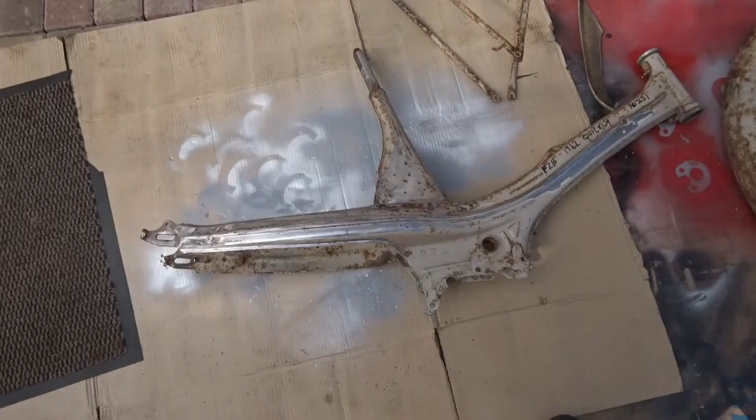This video is the restoration of a 1962 NSU Quickly. I was going to leave it with the original patina on it, but I've decided against it. I just think it's a bit too rusty. I might do that with some other one later, but this one I'm going to clean it off and restore it.

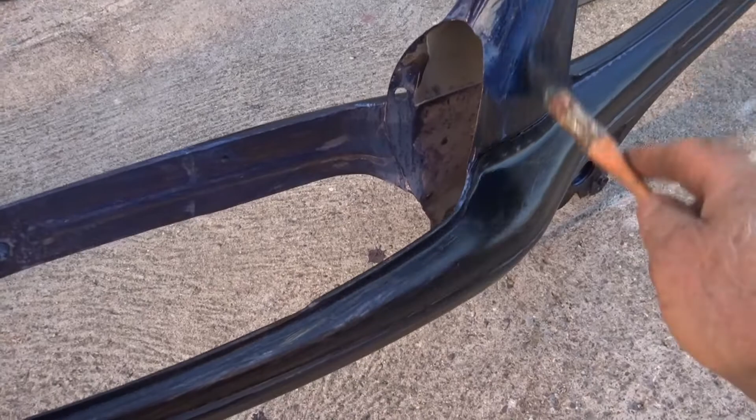Now that's the main frame. I've just finished cleaning it off, so I must put some Kurust on it now to stop it from rusting, and that'll do for today. Now I've just applied the Hammerite Kurust, which is what I use, and it turns a kind of a blue colour first, and then it changes to black as it dries. Just trying to make sure that I have every bit of it covered. I'll turn it upside down now and get the underneath of it once that section is dry.

Now it's after turning completely black. Still not fully dry, so I'll leave painting it until tomorrow. It's getting late in the evening now for painting. Temperature is dropping.

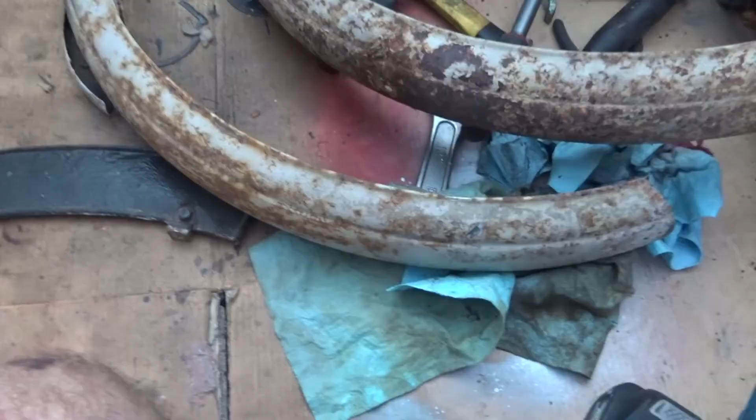These are the mudguards off of the bike and the carrier, so there was an awful lot of rust on them, so too much patina altogether, so I've decided to clean everything off and completely restore it. Now I had it undercoated, and I've just put on the finish coat there, light grey. And over there I have one of the mudguards half done. I must do the inside of it, so I'll crack on with them now.

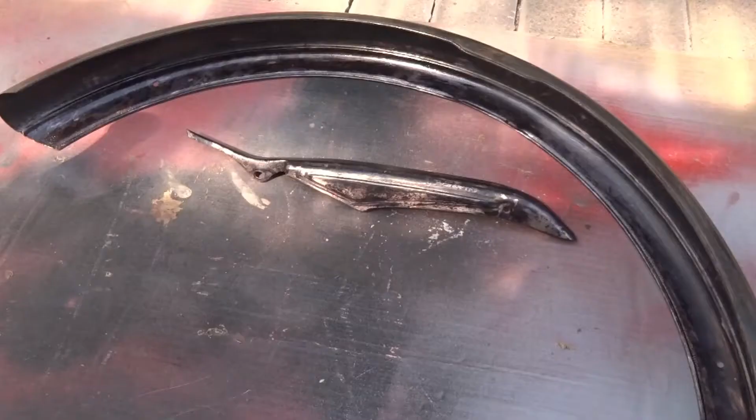The main frame now has been drying for 2 days, and I'm just after putting the plate marker back on, which is on the stock there where the swing arm goes on. The frame number is also stamped in the frame just above it. I have the front mudguard with the Kurust on it now. I'm going to undercoat it next, and the rear chain guard, I have that done as well, so I'm going to undercoat them now before they get painted later on today.

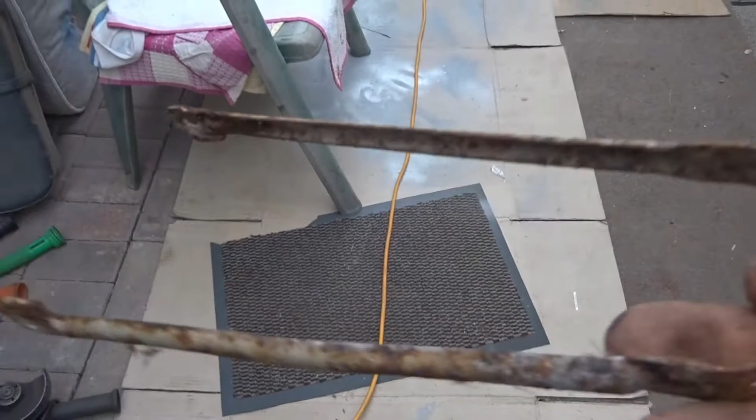I'm working on the mudguard stays at the moment. I've just put the Kurust on that one. I have another one there to do, so that's what it's like before I start. And I have 2 more of them done there. The Kurust is drying.

This is the saddle that I'm using now for the 1962 NSU Quickly. Needs quite a bit of restoration. I must take it apart. It's all damaged and unusable.

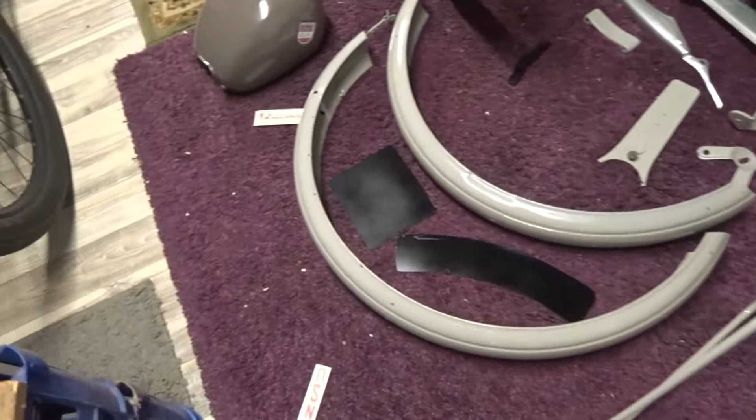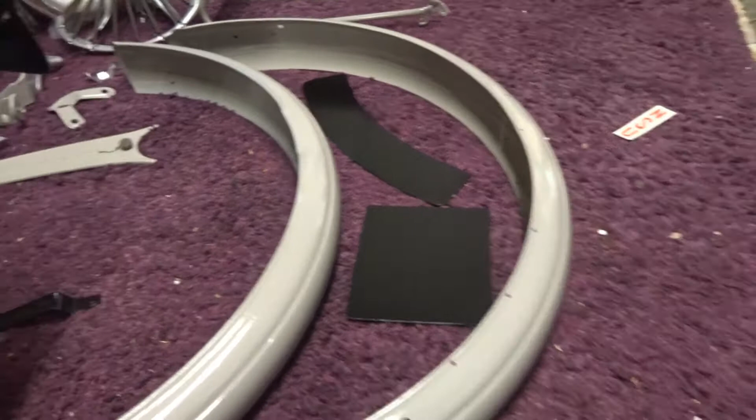I've got quite a lot of the parts for the 1962 Quickly painted now. They've been sitting for about a week or more. I haven't everything done, but I have quite a lot of it done, so these are the parts here. Number plates, number plate holder, different things, and I'm just putting the stickers on the petrol tank at the present time. So the badge is on and the Quickly writing, so I must just put on Quickly on the other side here now, and I must put NSU on the back mudguard. I must do the numbers on the number plates as well.

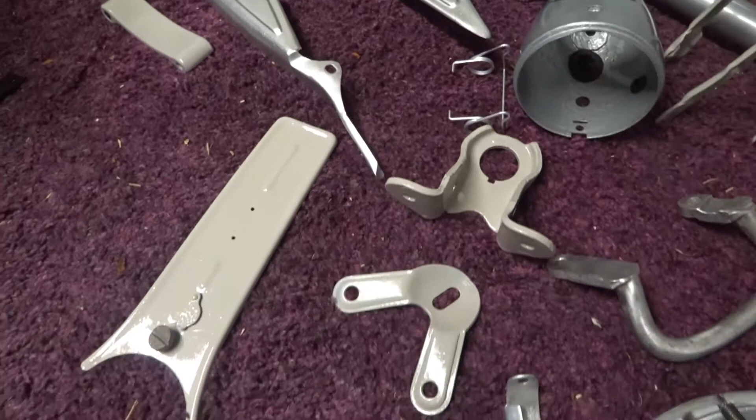And that's the seat that I completely restored, and just a soft cushioning to go there, and more than likely this crimson cover is going to go on it, but we'll see when I have most of it put together whether I'll put the crimson, cream or grey one on. I've done the light, I have the spring there for it. The mudguard sections there to hold the mudguards in place. The mudguards themselves. Swing arm. It's completely done. And the main section itself. And the nameplate is on it as well.

Now I'm just attaching the Quickly to the tank, and I'm rubbing it as much as I can to get it to adhere to the tank. There was a white backing on the thing, you have to take it off and make sure that these letters stay stuck to this see-through section. So hopefully when I pull that off now, the see-through section, the letters will actually stay. I have to pull it off slowly just in case anything is not 100% stuck.

That's it. Turned out perfect. Just give it a slight rub to make sure it's okay. So that's that. I'll do this one on the back mudguard a bit later. That's the mudguard there, but I have to check where exactly the number plate is going to be sitting on the mudguard so that this goes actually above the light then.

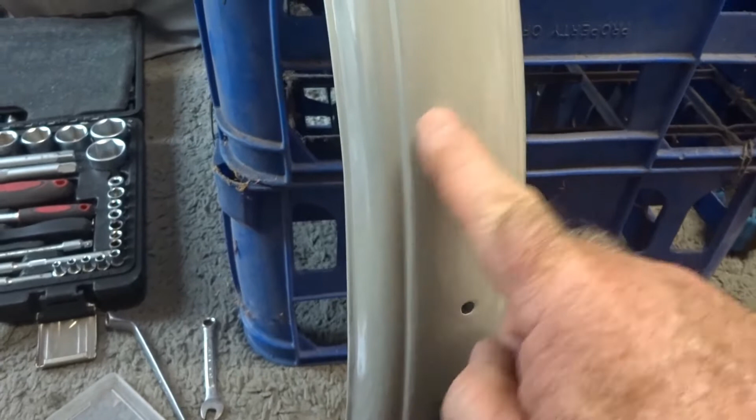I've attached the NSU symbol on the rear mudguard there now, and the measurement for it is roughly 275 millimeters to the bottom of it, because the rear light is going to be situated here, so it has to be above that 27.5 centimeters or 275 millimeters.

I'm now attaching the number plate bracket with 4x10 stainless steel nuts, washers and spring washers. So I'll carry on with that now.

Yes, I'm continuing here now, and I got sick of cleaning rust off of items, so I said to myself I needed to start seeing a bit of progress on putting the bike back together. So what I've done there now is I've actually put in one of the suspensions there at the bottom, and I have the piece here for putting in the other one. There should be a spring there somewhere as well.

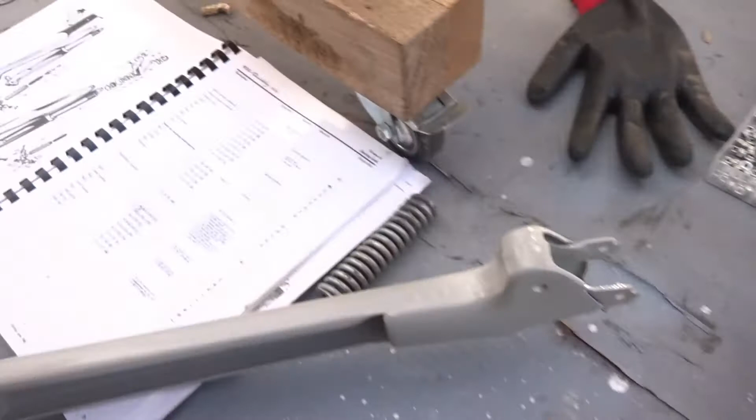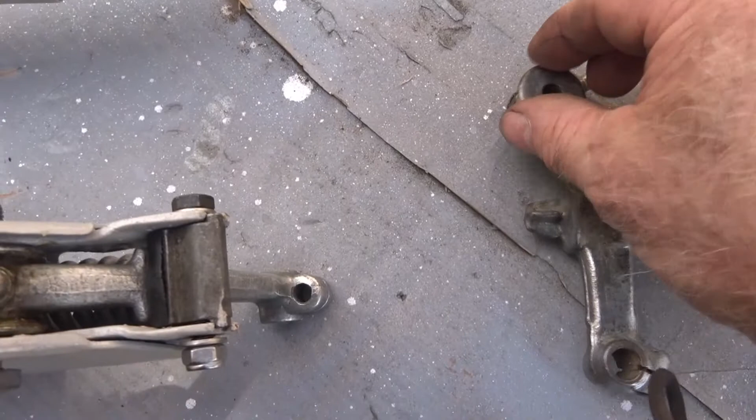That is there. So what you do is put the spring in first, like so, and there's a little space up there at the top that it sits into. Then you take this unit, and it has to go in at the back here where the big holes are, like so, and this section sits into the hole in the spring. So you've got to put it in there without that falling off. Like so.

So now we've got to get a bolt through it, which is this one. And this bolt goes from the outside in, like so. I'll have to do it now. That goes through that and out the other side, and in some cases the mudguards attach on here, so I'm not going to put any nut on there at the moment.

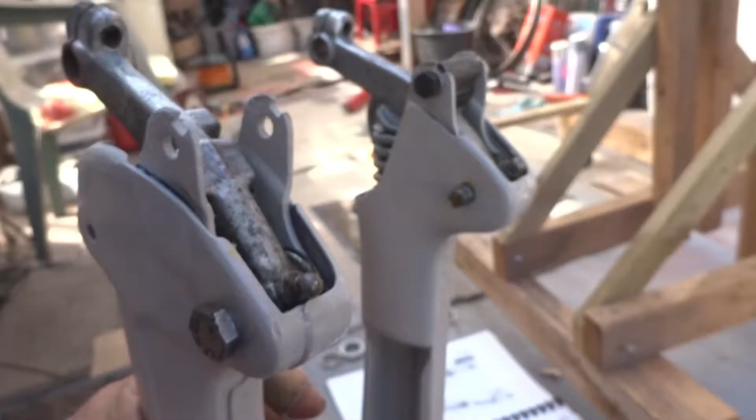Now I have that bolt in there, and I must now put the little rubber suspension on here with its bolt that goes through. The way to install this here is there's a little rubber cushion on the lower section of it, and a bolt goes through the top section to hold it in place, but to get it on you've got to push down on the spring on the front. But it's difficult; if I had somebody with me, I could show it better.

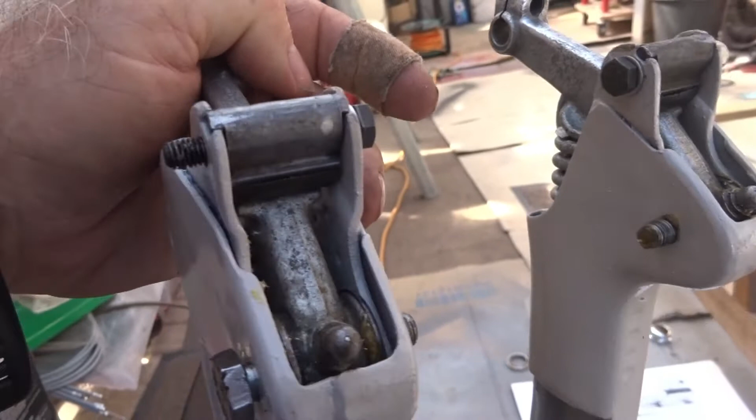Now that's it gone through there with the bolt going through it. It doesn't matter which way you turn the bolt around, inside or outside, it doesn't matter.

Now I'm actually going to put on the swing arm and I'm going to attach it to the frame itself. And these are all the component parts here, which are in the book somewhere there. The top nut, the finishing nut, the locking washer, that's the unit that holds the handlebars, which is there. Then there's a circular washer underneath, which is there. Then there's a nut which goes on. Then there's a cover plate that goes over the top ball bearings, and that's the top ball bearing race.

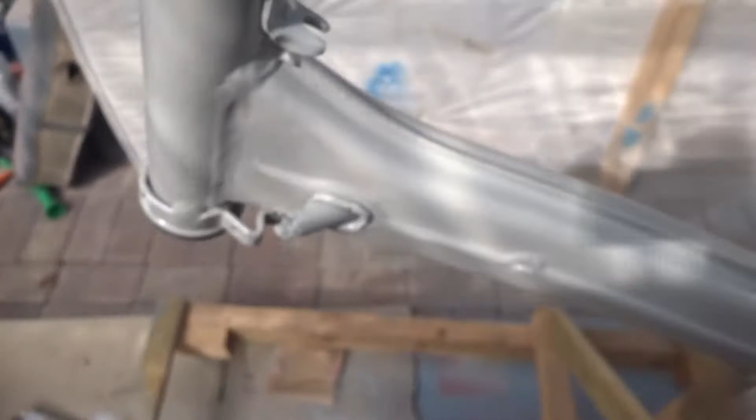So I've got to put on grease here now and 21 ball bearings, and the ball bearings are held in place by that cup there. Now I've attached the 21 5mm ball bearings to the bottom section, which will go up through that, and I've attached the 21 5mm ball bearings up on top as well. Now I have to work quickly. I'll be putting on this top race, the cover plate and the lock nut so that all the ball bearings won't fall out. So that's the next time you'll see it.

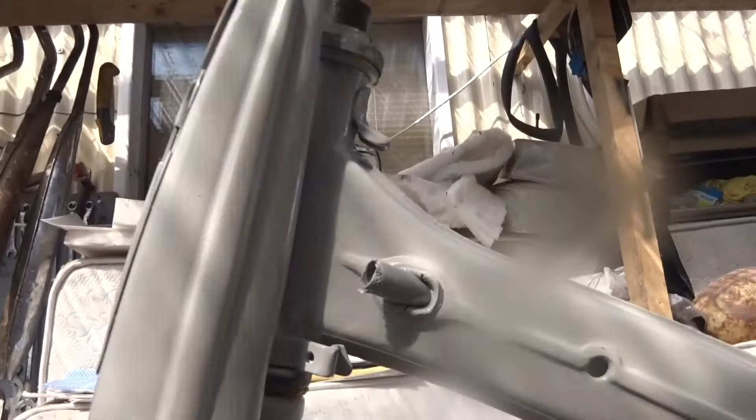Now that's the swing arm in place, and it's held down with a 36mm nut. I have a box spanner that I use to tighten it, so I'll just tighten it up like that, and that's it, as far as there anyway. It's working perfectly.

Now the next thing to put on is this circular washer that goes on there, like so. And then the mechanism for holding the handlebars and the light goes on next, like so. Then the lock washer goes on there. There's a little section on it there that goes down into that hole. And finally the lock nut.

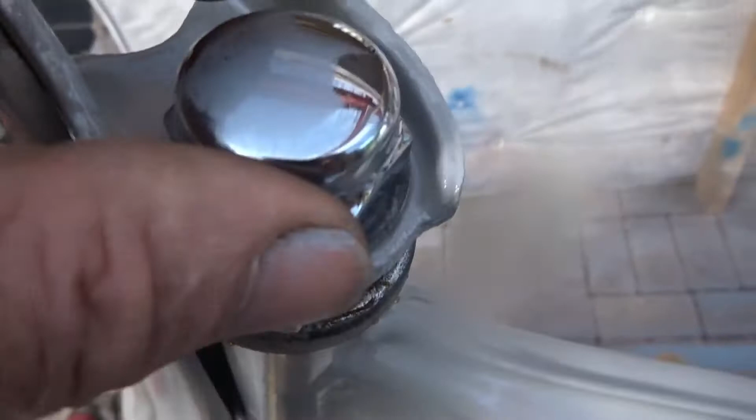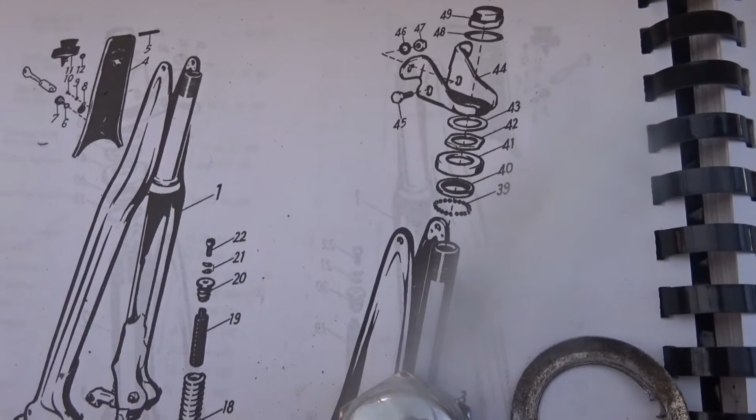But I've got to attach two 8mm bolts there now onto that to hold it in place, and also to stop any movement here so that the ball bearings couldn't actually fall out. So I'll take them off for a second and I'll put them on in a minute. Now the two bolts that I required there, number 45, are 8x18, and I must put washers on them, spring washers inside and nuts.

So I don't have 8x18s, I have 8x25s. I'm using stainless steel, so I've put on two of those, and I must put on the spring washers now inside, like so, and then put a nut on it and tighten it up.

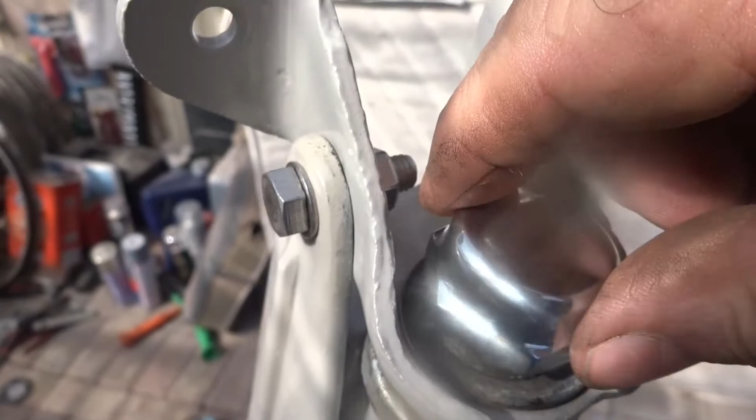Easier with two hands. Now those two 8x18 bolts are what you're supposed to use. Right, this is the lock washer going on, and then this is the final finishing nut at the top. I think it's 32mm in diameter. My box spanner is specifically used for this, for Quicklys. It's a 32 and a 36, so this is the 32 at this side.

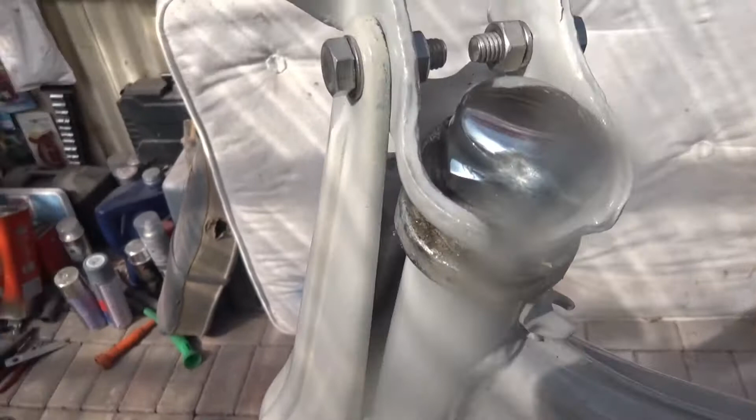So I need to put a bar in there now and just tighten it down. So that's it for the moment. I'll tighten that now a bit better. To install number 9, which is a little rubber plug. This is it. There's one on each side. Number 9 is a rubber plug, and they're them. So they go into that hole there.

One there, and there's another hole there. So I'll put them in there now. They're difficult to put in. Now that's one of the little rubber grommets in place. The other one is at the other side. And the purpose of them is that when the swing arm goes back like so, it has something to bang off of. As you can see, they do tend to wear out quickly enough, but when they're not there, if you're banging the swing arm off of that, you do tend to bend it slightly.

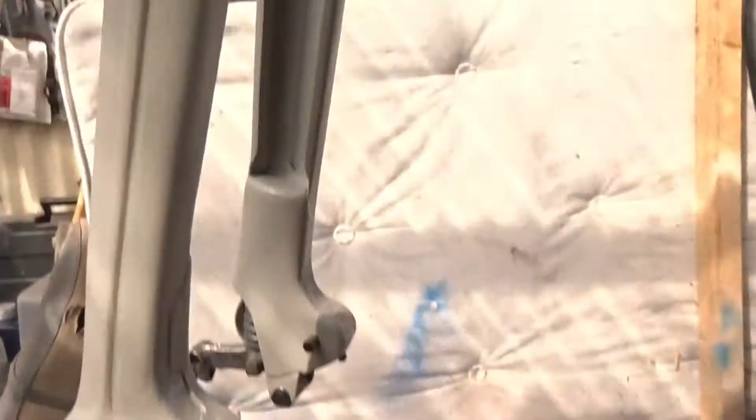Next thing I'm going to attach is the front mudguard, and it has a hole there, and in actual fact I was looking at the book, and number 16 is a bolt. It can be M6 by 12 or M6 by 15, so that's what I've got, an M6 by 15, and it goes up through that threaded section there where the toolbox cover goes on. So I'll put that on next now. Now that's the bolt in place, the M6 by 15, and I put a washer on it, and I put a shake-proof washer on it as well.

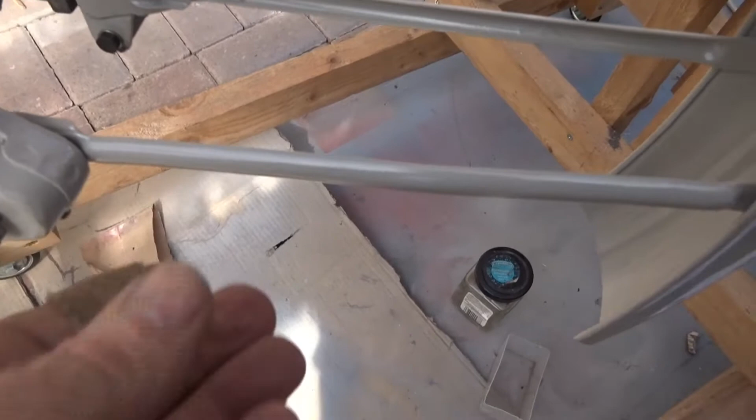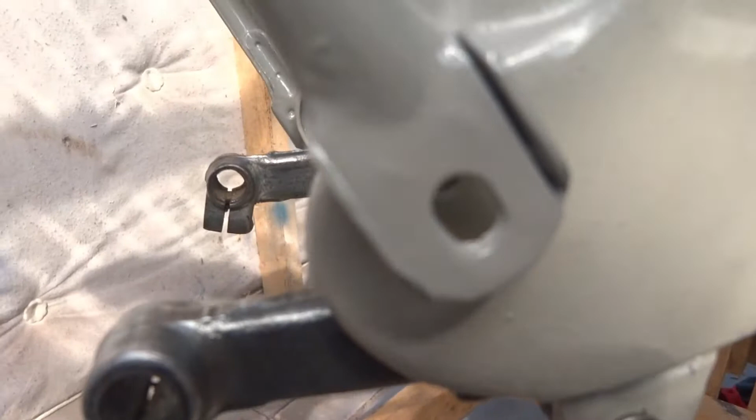So the next thing to do now is to put on the mudguard stays. One goes on there, one goes on there. Now that rear section of the front mudguard is a short one, the stay is quite short. I'm going to attach it now with 4mm stainless steel nuts, bolts and spring washers. The front one then is a bit longer. This is the one here, and that attaches there to that, like so. It's just a bit of manoeuvring to get the holes lined up, and that will be that done then.

Now I have the two mudguards in place. I must put on the two nuts there yet, but I must clean them off. They're a bit on the rusty side, and paint them. There's an unusual thread on those things, and the nuts that I have here don't actually fit on, so I'm going to have to reuse the ones that came. Now the front mudguard is the same as the other one, 4 by approximately 8 to 10mm. I had only 20mm, so I'm going to cut them off with the angle grinder.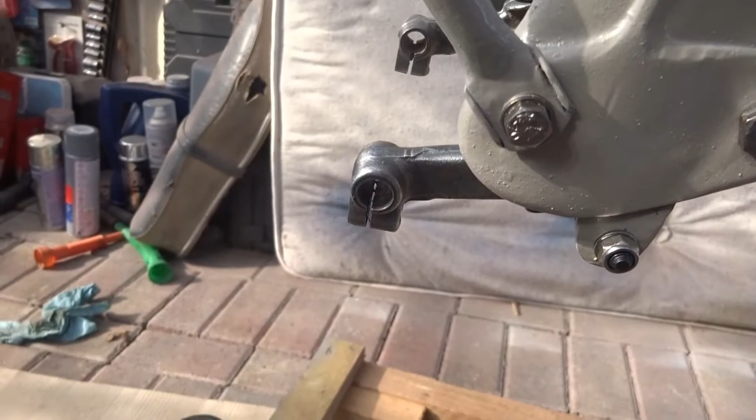And down here then it says in the book to put in number 18 and 19, I think it was, yeah, 6 by 8. I've actually used 6 by 10 with a washer and a spring washer to make sure that they don't come back out. So that's the front mudguard now in place. I think I'll put on the rear mudguard now.

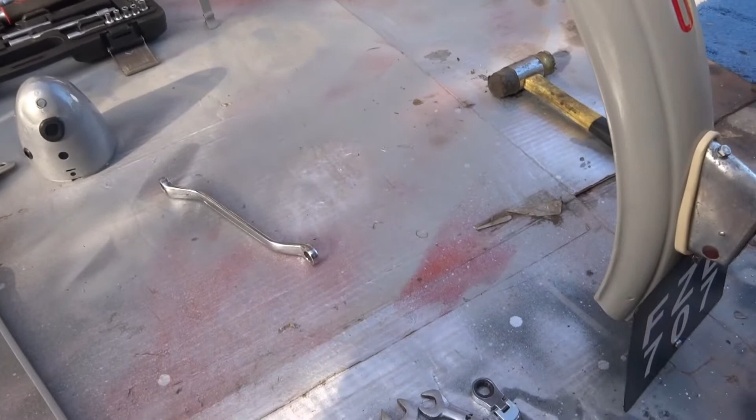The rear mudguard, and I put on the taillight yesterday, so I'll actually be putting on the wiring loom when I have that on as well. It's one of the best times to put on the wiring loom, when you have the mudguards on before the wheels. I put on the taillight yesterday, and the NSU sticker and the number plate, so it's now ready to go on to the frame, and then I'll be able to put the wiring harness on and bring the wire out to the rear taillight.

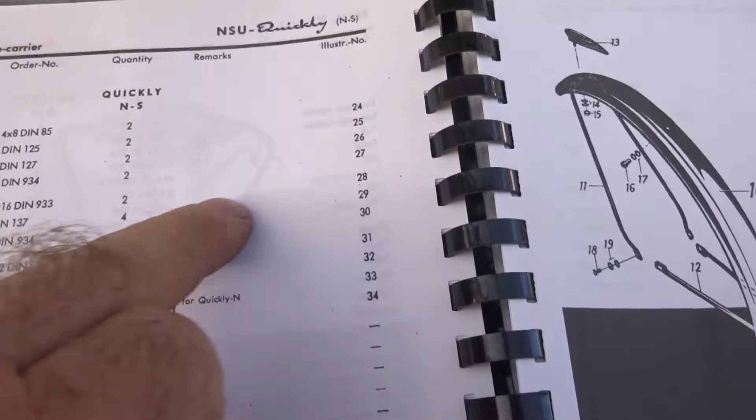Putting on the rear mudguard, you have to install it with number 28. Number 28 is M6 by 16 bolts, and then inside spring washers and M6 nuts at the other side, which is inside here.

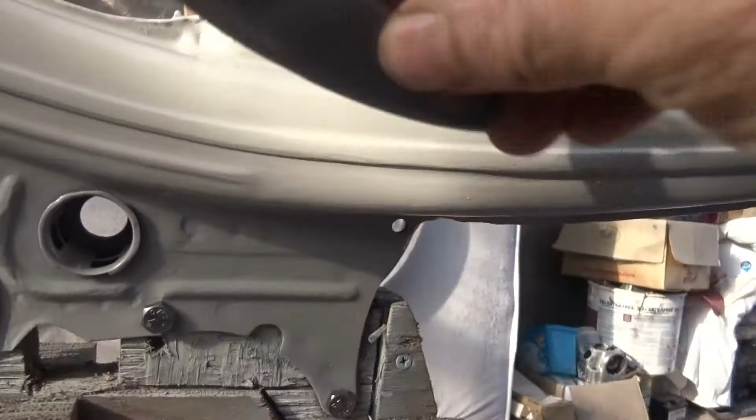So this section here doesn't look great, so they invented this piece to cover it that goes on there, and it's bolted through the mudguard. Now that's the cover plastic in place there as well. 6x16 bolts. I used lock nuts internally altogether, even easier. Next thing now is the rear mudguards and then the carrier.

I have the rear mudguards there. Again, I've used M4 nuts and bolts. Mine are 20mm long. I'm just going to cut them off. They're meant to be, I think about 10mm is long enough for them, maybe 12, so that they don't get caught in the wheel. And if you'll notice the mudguard that I've put on this one, there's a hole here. This hole is for the chain cover.

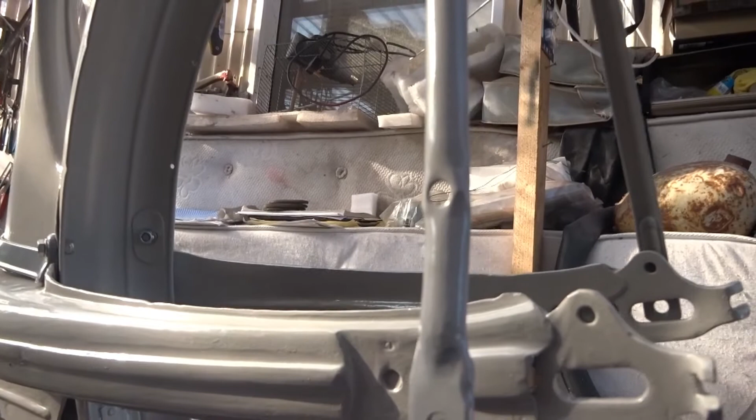This is the chain cover. The chain cover goes on there like that. It's attached to it, a 6mm by 10mm bolt there, and a bolt goes through there and in through that hole there. But I need to put on the other stays, mudguard stays first, before I can do that.

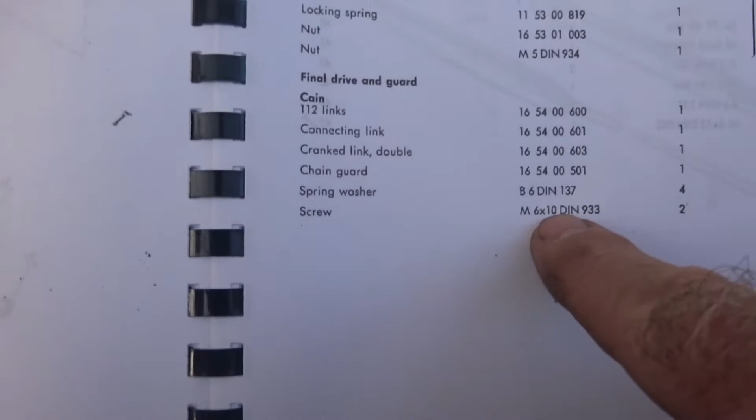This is the chain guard at the rear, and I'm just looking for the size of the bolts. Number 30, they're 6x10, and number 29, spring washers, so there's 4 spring washers to be put in as well. Yeah, so that's it. I've just put the M6x10 to hold the chain guard there in place. This is the best time to do that, put the chain guard on, because it can be very difficult afterwards.

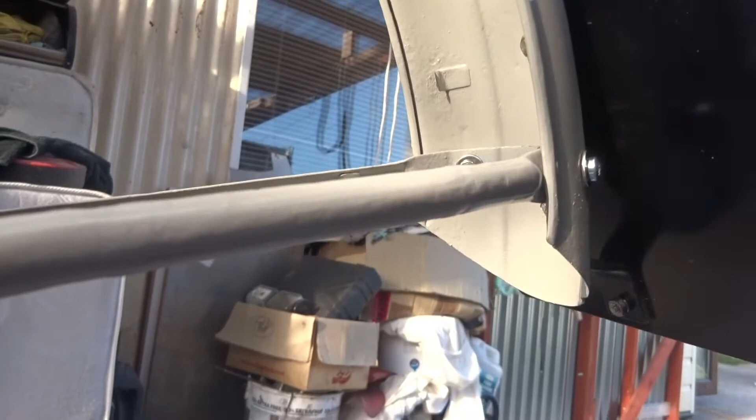Now that's the rear mudguard in place again with the 4mm bolts, and it goes on like so. And if you see here at this side, there are tabs. They must match up with these tabs here because they're for the wires. The wire must come across at that side and out into the taillight.

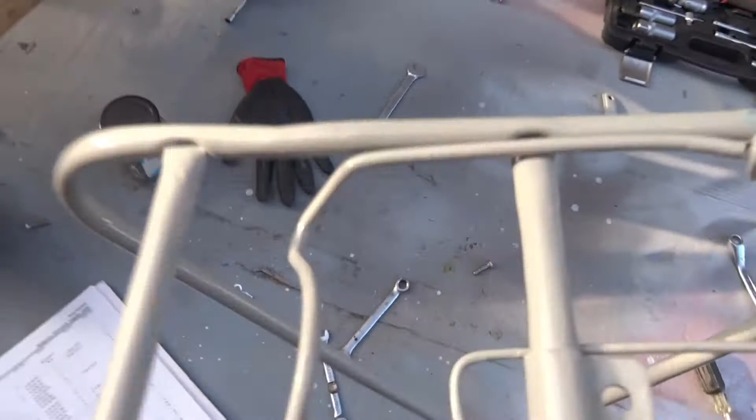Now the carrier is the next item to put on, and it's attached with number 2, which is a 6x12, spring washers and a nut, and that goes down through that hole there and that there, and this is the way it goes. The air pump goes at the back. Like so. There's a maze of things coming together here now that will be going into one hole with I think it's a 6x30 approximately, but if it's too long I'll cut it off.

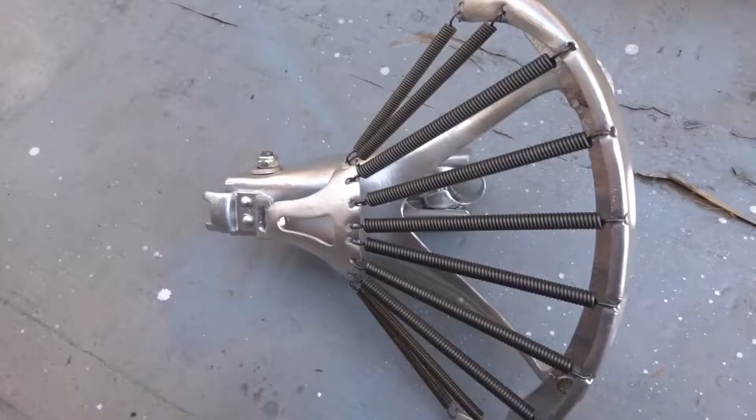This is the seat now that I've restored, and I'm going to attach it to the bike. So I just need to loosen the nuts there now on the side to drop it down a bit so that it's not too high up, and fix it in place. Now that's the seat in place, tightened up, and that's the progress up to date.

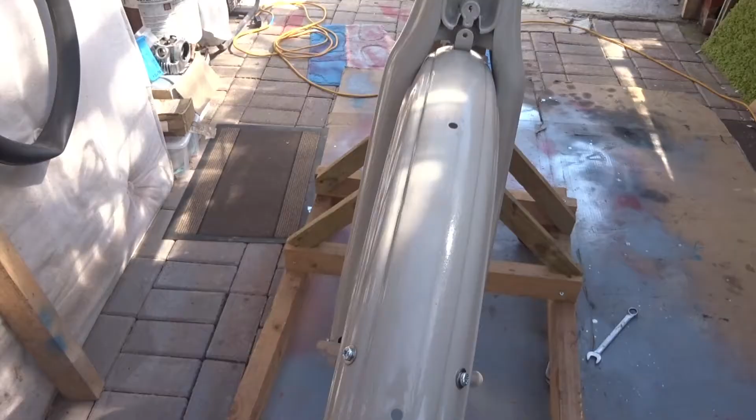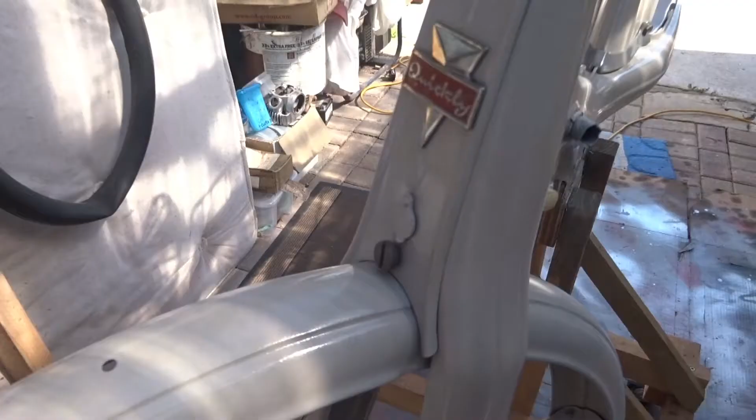I'll probably put on the handlebars next, and I must put on the wiring loom as well. I'm not doing the top of the seat yet because I'm not sure what colour seat cover to put on it. I'm just going to install the toolbox. I have the knurled screw already put into it and the Quickly emblem, so I'm going to attach it onto where it goes now, like so, and we just have to screw that into this hole here. That's it in place there now with the knurled screw screwed in.

This opening section here is for the lock, but in this case the lock isn't working because it's very hard to drill them out, so I don't bother fixing the locks. I'm installing a set of cords on each side. They clip in there into the mudguard like so. And in the early bikes up to 1955 there was normally only 2 holes, so you would only be using one, but in the later models there's 4 holes, so you have 2 sets of cords each side. That's the sets of cords in place there now, and there's a special hook down here that they go around, and the same at the other side.

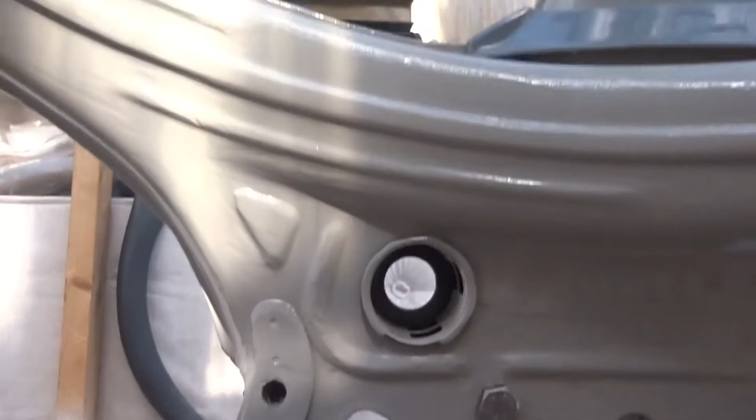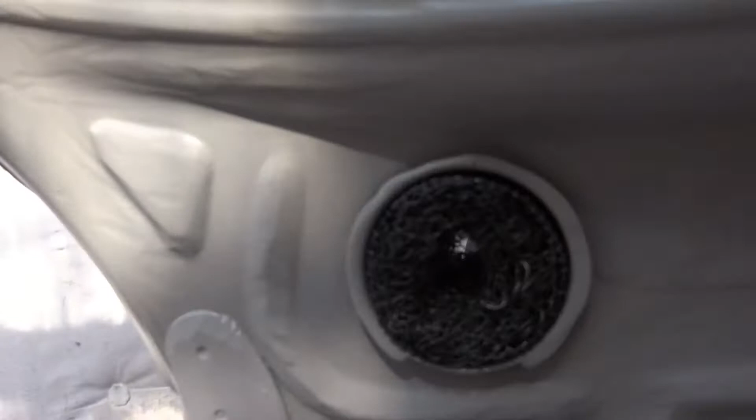In this part of the frame here goes the air filter, and it's a wet air filter. It's a little circular mesh thing, and you have to steep it in oil, and that's why it's referred to as a wet air filter. So that goes in there like so, and there's a little rubber cover that goes over it, and there's a lip there as you can see, and there's a lip on the little rubber cover, so I'll put on that next.

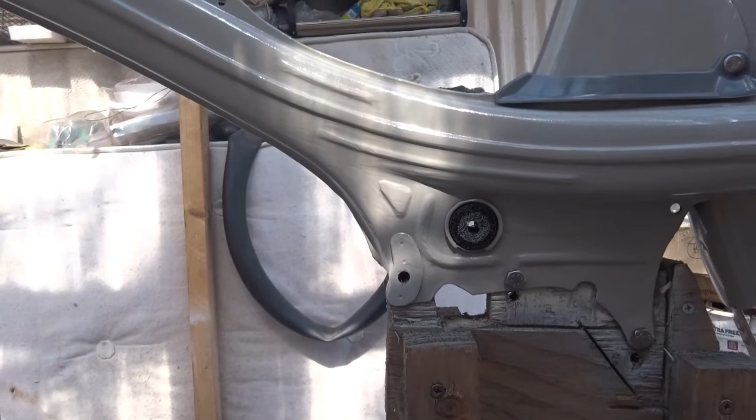In this section here is a wet air filter. I've just put it in there, and you have to steep it in oil. I've just steeped it in oil. That's why it's called a wet air filter, to retain any particles of dust that will get in there, and that's covered then with a rubber cover. It has grooves on it there that hook over the grooves on that there. It's difficult to get it on, but with a bit of ingenuity one gets it on. That's it in place now, hooked over the little rim so it won't fall off. That's the little rubber cover on the air filter there now. It's finished.

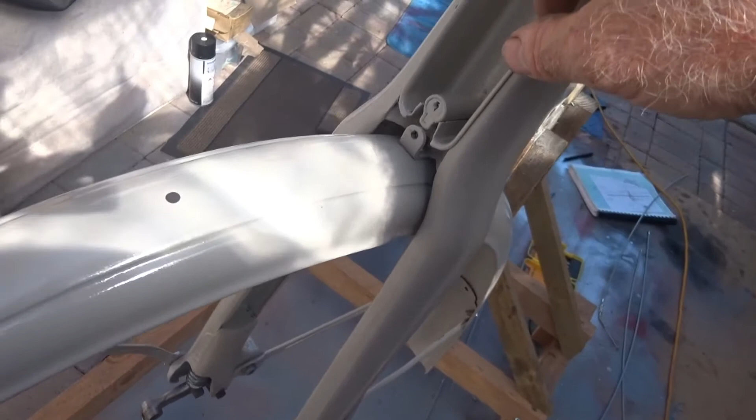I think in the early bikes, if there was a speedo, it was at the other side. I'm not 100% sure about that, but anyway, I just brought it down there. The hole is big enough for this collet to go down, so that's it. It's just in place anyway, just for the time being.

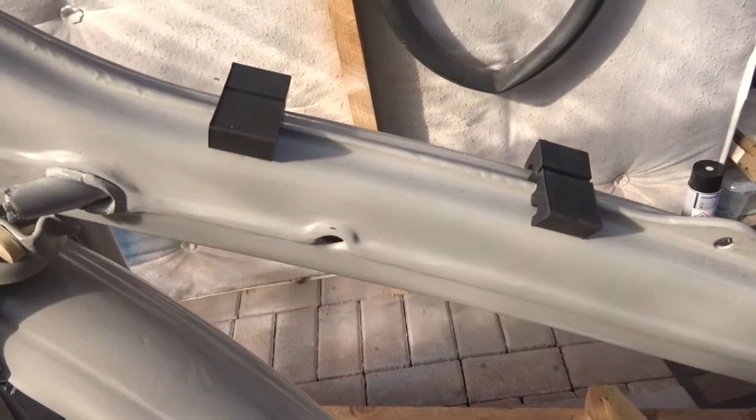I'm after putting on the 2 rubbers there that go underneath the petrol tank, just sitting there in position at the moment. I have the tank strap which goes on here. There's a hole down and there's a small little pin that goes through. Like so, and that holds it in place. So I have the tank here.

I'm after putting the petcock onto it. It's better to put the petcock on and ensure that this section is outside, otherwise if we were trying to put that on afterwards it would be getting caught on the frame, so on the outside.

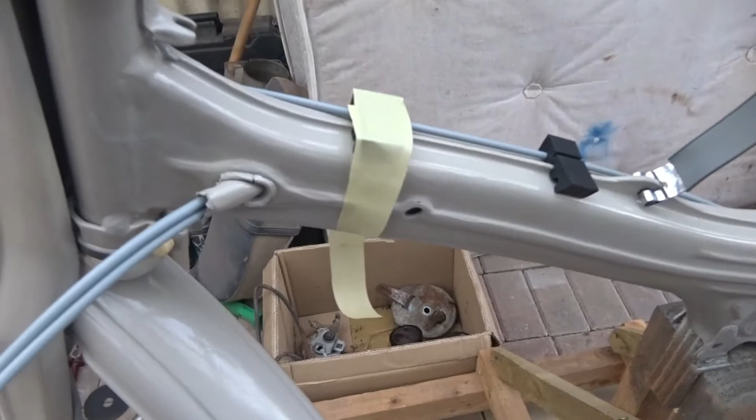I was attempting there now to put on the tank, and I just realised that there's a few things that you need to do before you put the tank on. Now it doesn't stop the situation that you'll have to take the tank off again, which I've had to do before, but these are what they call the tank rubbers. There's 2 of them that sit underneath the tank to cushion it against the frame, and sits on that section of it there.

So the throttle at the other side, which will be here coming down, normally it comes down under the petrol tank, so I have put on the cable here and I ran it down, and I've just left it roughly the right length, because when the petrol tank is tightened down on this it can be hard to move it, but we'll see how it goes.

I've also... this isn't always on Quicklys. It was on this one and I left it, and there's another section of it comes out at the end. I don't know if it's full length or not, but I've put in the clutch and gear change cable, which is where they were originally, down through that, and they're coming out at the bottom there. So I'll be able to pull them down further when I take it off the stand.

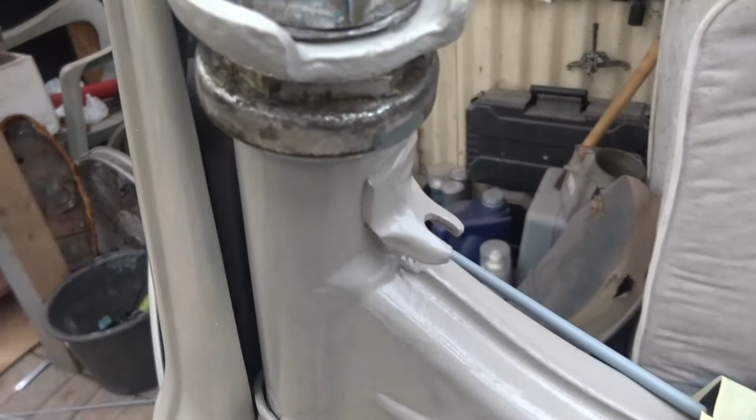So to keep the rubbers in place, I put on this piece of tape around it, and I can rip it off afterwards when the tank is on. So I'm just going to put another bit of tape around this one to keep it in place, and then I'm going to put the tank on. The tank is fixed then with a bolt here. I'll show that in a second, and the bolt comes up through here and it tightens the tank down. This is the tank strap and the rubber.

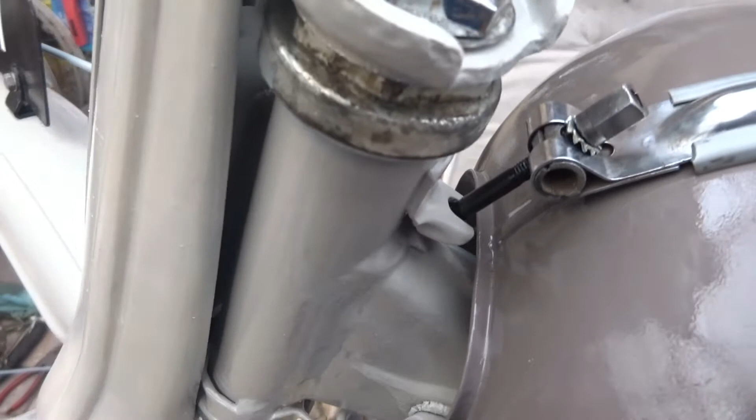Now I've attached the tank on there, sitting on the rubbers. I need to tighten it down a bit more, it's still a bit wobbly, but it's a 5mm bolt. This one has a hexagon head on it, and there's a shake-proof washer there, and then there's this little bolt mechanism that was on it. So you just tighten that down, and basically one will know when to stop.

Also, I said earlier that the petcock has to be put on before you put on the tank, otherwise it will be very difficult to get it on, because the width here is wider than the space there. So put on the petcock before you put the tank on. So now you can see the throttle cable coming down there underneath as well. They're all just sitting loose at the moment now, all the cables. That'll be going up there like so.

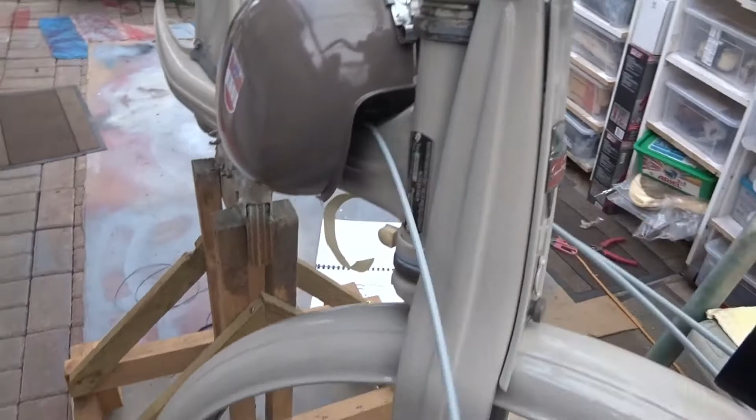Right. On normal NSU Quicklys, there's a symbol that actually goes here at the front of the bike, but in Ireland you're required to have a number plate here, so there's two holes here, and these are the brackets, and that's the number plate to go into the brackets. So I must put on these two brackets now with 6 by 10, I think will be okay, because they actually screw up through it, and I'll just check to make sure, but I might have to cut them slightly.

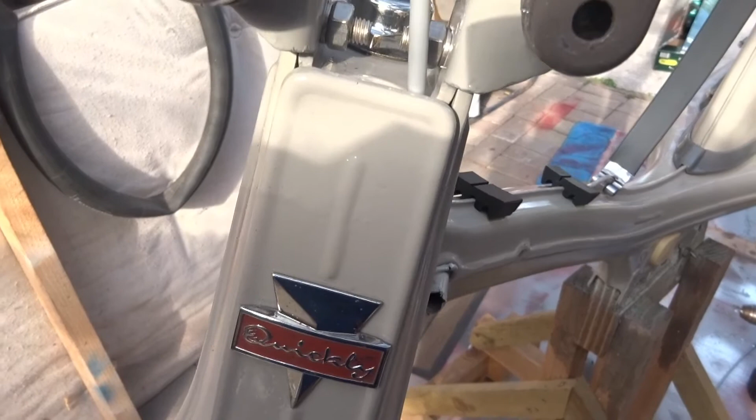I'm just about to put on the handlebars here now, and the handlebar brackets go on. They're attached like that, and then the lamp holder goes on the outside of it.

That's the handlebars in place now. It's an M8 by 45mm bolt. Mine were 50, so I had to put an extra nut in there, because you have to put 2 dome nuts on the end. So the brackets sit on this bracket, and then the lamp housing, or it's a bracket really for the lamp housing, and that sits on the outside of it.

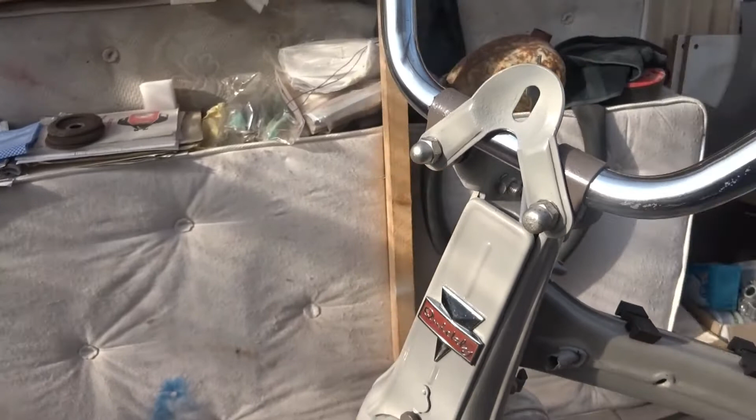This is the lamp holder. I've just put the speedo cable up through that hole there, and it's attached with an 8 by 10mm bolt, which comes out there, and it has to be short because it would get caught on the speedo. So I'll just put in that bolt now and lock it in position. That's the lamp in position there now. Speedo coming up through it.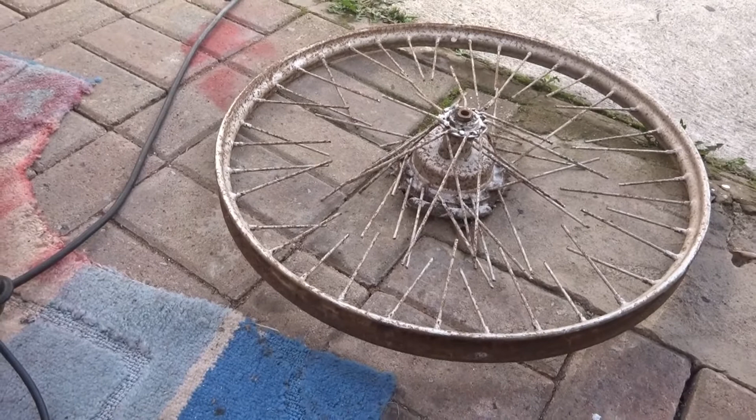Now these are the 2 wheels I'm using for this Quickly, and I'm going to put new spokes, so I'm cutting off the hubs to retain the wheel itself, the rim, and we'll set new spokes into it then.

Now I'm after taking off the rim from the... oh dear, I can't think of it. I've taken off the hub off of the wheel and the spokes. I'm waiting on new spokes, so I'm just about to clean the rim. It's not in bad condition, it's very good actually, and I have the rear wheel then ready to cut the spokes off and do the hub first and then do the rim itself.

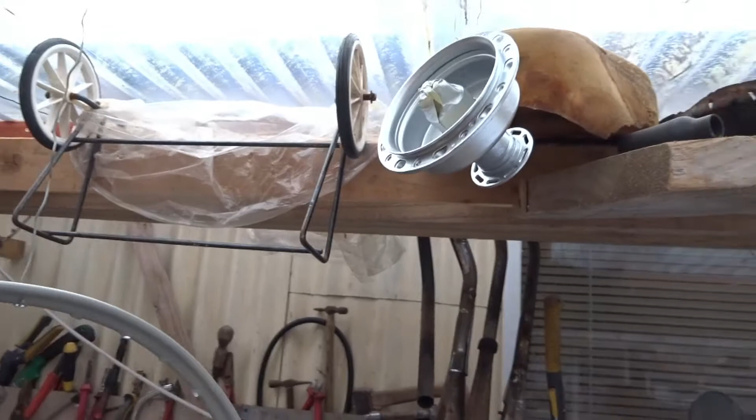This is the rear wheel rim, and I have just put one coat of paint on it, and that's the front rim, the hub there, and I've painted it so it's drying. And this is the rear wheel. I have ground off all the rust and I've put on the Kurust on it and waited for it to dry now to undercoat it. So that's it.

The spokes have arrived. There are two different size spokes. There.

I'm just after respoking the rear wheel there now, and I had another one which is a bit rusty. I used it as a pattern to do this one, so I have to tighten them all up now. At the moment it's just shaking about, so I just have to tighten them all up and get it balanced and all that sort of thing.

Now I'm starting the front wheel there, and again I'm going to follow the pattern that's on this wheel. So you have to start where the hole for the air section is, the air hole, and I'm going to take this spoke here and I'm going to put it on this one here, which is the first spoke beyond the hole. So to do that, it's on one of these holes, not on one of the wide holes.

And when you're doing spokes, and particularly on these Quicklies, it's every 4. So when this one is on, you count 1, 2, 3, 4, and then that's the next one, and then 1, 2, 3, 4 for the next one again, and then the same with the other ones. Now what I'm doing at the moment is I'm putting on the upper ones. I'm putting on the top ones first and then the ones underneath, so I'll see how it goes.

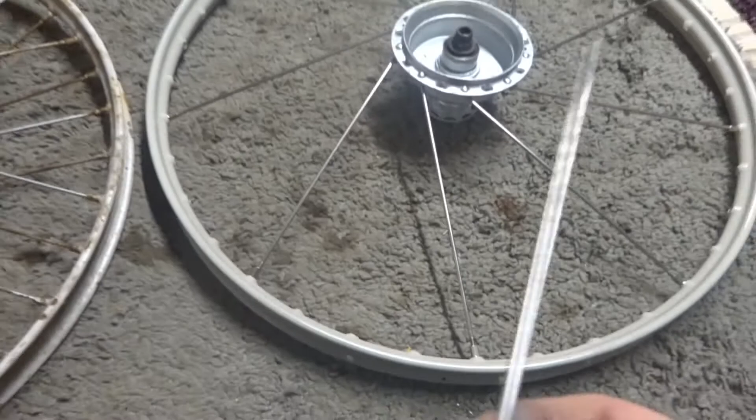So now I've put on the upper spokes, and they're actually the short ones. There are short spokes and there are long spokes, and the reason for the long spokes is because this diameter of this thing here is shorter, so the spokes have to be longer. So I've done them all at 4-hole intervals all around. As again, I've started at where the valve goes in, and then I checked that there was a hole here.

There's another one at the other side there, and I've lined up that hole there with the bottom of my thing there, and I've taken the spoke from there to the first hole and the spoke from there to the first hole. So now, they're the top ones, the next ones are underneath them, so they're actually going to be going into all these holes here. And we'll just look at the first one.

So that's our spoke there. So if we put in the spoke there, it goes across over there. Now I'd prefer to try and work with a spoke that actually starts down here, which is the second spoke here, and it goes in there, which is 1, 2, 3, 4, 5, 6, 7, 8, 9, and it goes into the second hole.

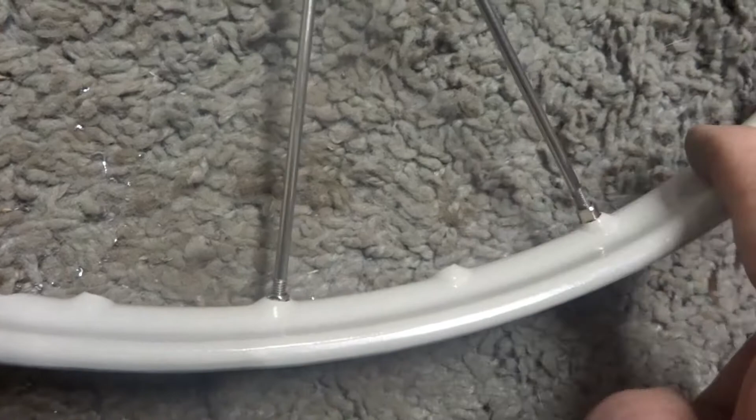So I've put on that one there now and put it into the second hole there. So the next one then should go 4 above that, 4 holes. 1, 2, 3, 4. So I've actually installed it. Right, so the next one will go in there now, and it'll go 1, 2, 3, and it'll go in there. So basically splitting all of these here into the middle, like so. They're all split in the middle there.

Now I have the front section of it done there, so I've now turned it over with the valve hole down there again and the valve hole here. So now I have to determine where either the first spoke or the second spoke here goes to up here. So the first spoke here goes up to there. So I have to try and determine. So these are the long spokes now. They're longer than the other ones. They're 263 or 265 mil long.

So the first one is on the bottom, so I'll do the bottom ones this time first. Did I do the other? Yeah, I'll do the bottom ones first. So this is it here. I've got to ascertain where it is in relation to. So it's 1, 2, 3, 4. So it's 4 marks over. By putting this up straight there, it touches that there. 1, 2, 3, 4. Right. So I'll take the hole here and I'll put that up there like so. So that's the first one, second one, third one, so it's the fourth one here. So it's going to be going down into that there.

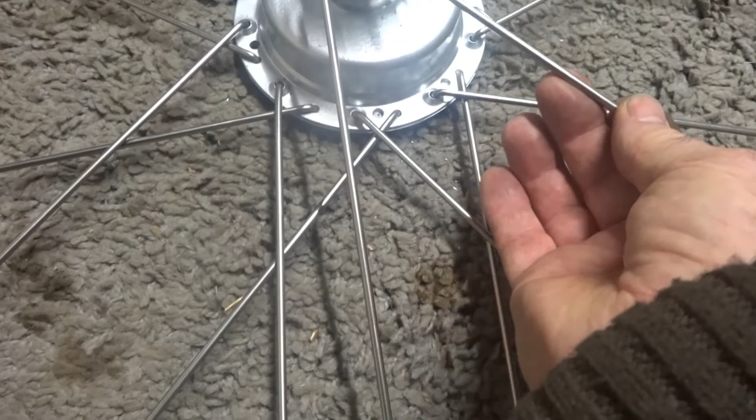So I'll put the rest of them on now. Each one of those, this one here, this one here, this one here, here. So this one, and then from this one here, 1, 2, 3, 4. So it'll be going into this hole here. That one goes in there. The next one goes in 1, 2, 3, 4 over there. So I'll do that all the ways around now, every 4.

So now I'm going to start the ones that are on the upper side. They're crossing over the other ones, so they have to be pushed up from underneath. Now I want to start with the one nearest to here, which is this one. So I'm again going to put my spoke like so, and it's 1, 2, 3, 4. So the fourth one up. So we put a spoke here and we go 1, 2, 3, 4. So it's going to be this one there. So it's got to come up from underneath, like so. So I have to lift the wheel up to do that. So now I've got it coming up from underneath.

Turn it over and into the second hole, second hole beyond the thing, and put on the nipple onto it just to hold it in place. So again, the next one, which is going to be here, will be 1, 2, 3, 4. So there are all the holes that are left. 1, 2, 3, 4, 1, 2, 3, 4, all the way around.

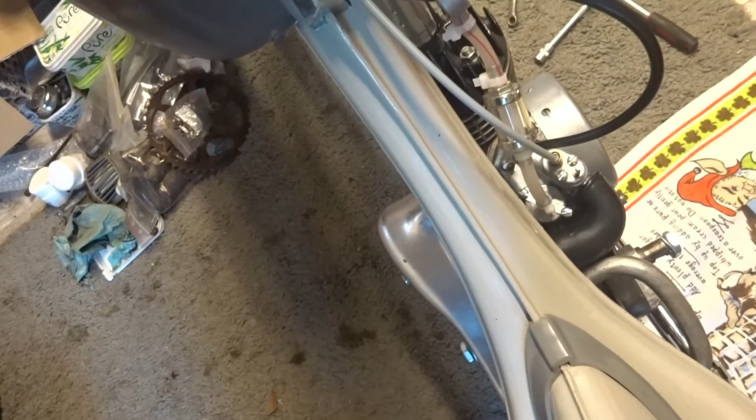Now I took the Quickly off of the stand, and I was doing one or two little bits and I forgot to video them, so I'll just update the situation. I had the wheels on when I took it off. I've added the engine since. I've connected up the petcock to the carburetor. I'm working on the seat at the moment, putting the studs on it to hold it in place. I put on the rear brake, and I put on the exhaust pipe.

I've connected up the cables as well, the front brake and the clutch and the gear change. So all I have to do then is put on the pedals. Now I tried starting the engine on the table, but it wouldn't start for me. It might have been the petrol was stale. So I'm going to get some new petrol and see if I can get it running. If not, I'll have to take it to a mechanic just to get the timing and stuff correct on it. So that's it at the moment. It's nearly finished.

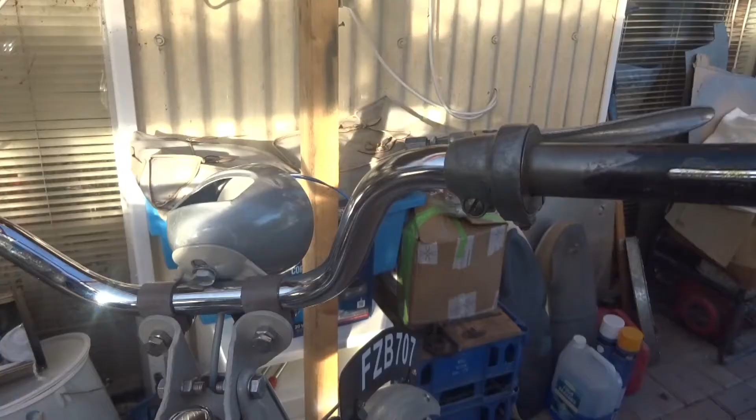Just putting on the throttle mechanism there. I think it's fairly tight. I'm after greasing up that area there so that it twists. And I'm going to put on the gear change on the other side there now next. Now I'm just after installing the gear change, and I have the front brake on as well, and it's working. I'm after installing the speedo and the light and the switch. I must just put on the dimmer switch on the outside. I've put on the grips.

So that's the progress at the moment. The next thing I think I'll do is put the saddle cover on. The engine is ready. I must just go and test it and try and get it going. So we'll do the seat cover next. Now I'm just after putting the cover on the seat there. And these bifurcated rivets, they're difficult bloody things to deal with.

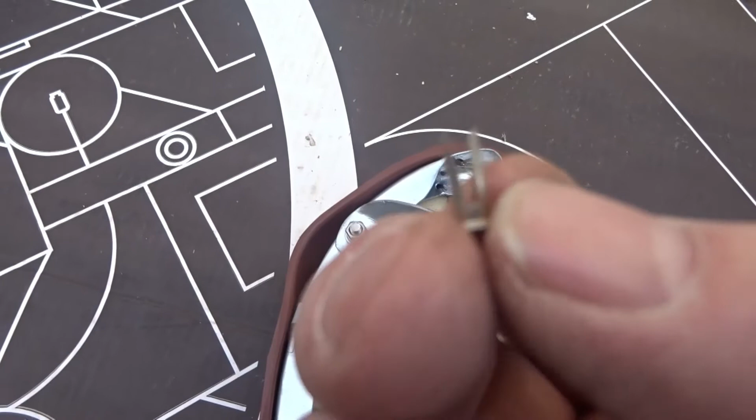That's one, and you have to prise the two prongs of it apart, and to do that you have to try and make up some sort of a tool, which I did with an old screwdriver. I used the straight screwdriver section there, and it works a bit. It could probably do with being much wider, but in any event they're on and they're holding it in place. A difficult little job to do. Now it's time to put it on the bike here, so I'll put it on there now.

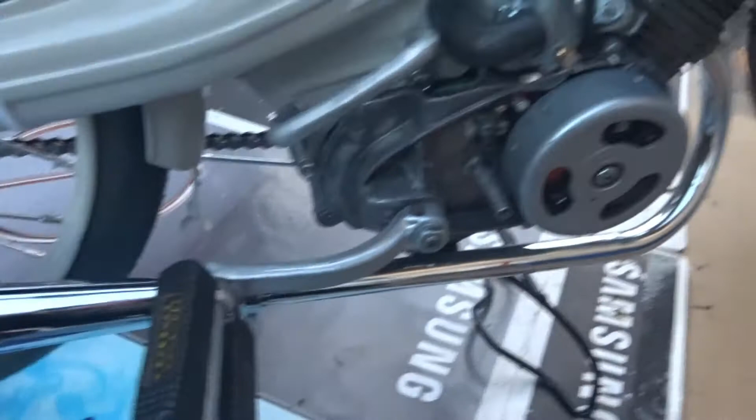Now I've just put on the pedals. On that side as well. So now I think I have the seat attached. I think I've only got the wiring to do now next. But I must find the wire in there. I did a pile of work there and I forgot to pull out the wire which is in under the engine here. It's coming down through the frame and heading to the back wheel, so I have to deal with that next, and then I can put on the cover here and I can try and start it up. So that's it.

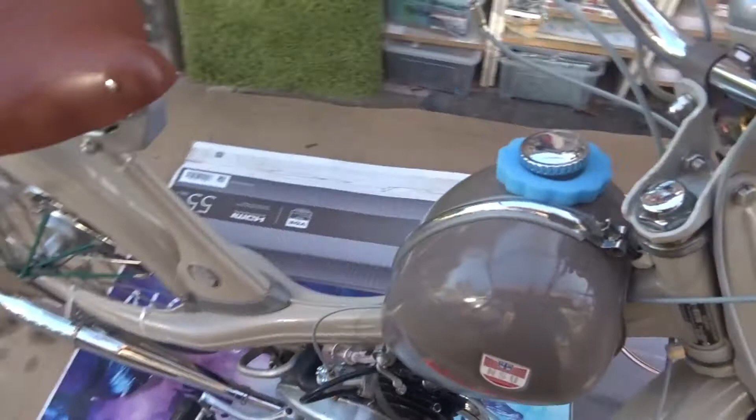Now I've just installed the horn there on it. The dimmer switch I've put on as well. What else did I do? I just put this here on the petrol tank to stop any spills happening. And I've put on the side cover here. So the bike is now finished.

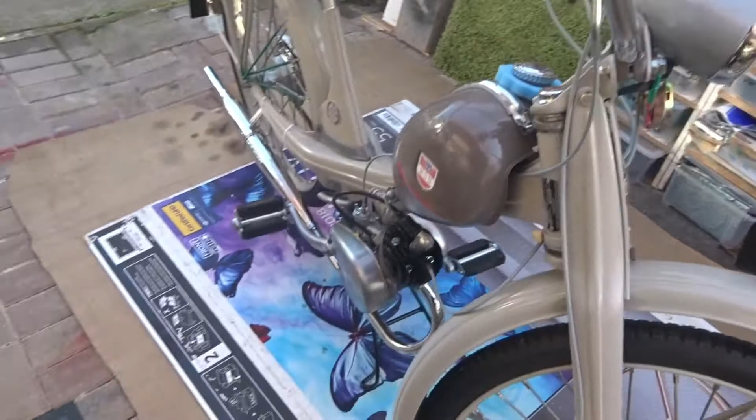And I've just started it, and it's running, but it's running a bit on the fast side, so I'll have to get somebody to have a look at it just to see if the timing is correct and stuff like that on it. So that's it. It's finished and complete. 1962 NSU Quickly N with 26-inch wheels.